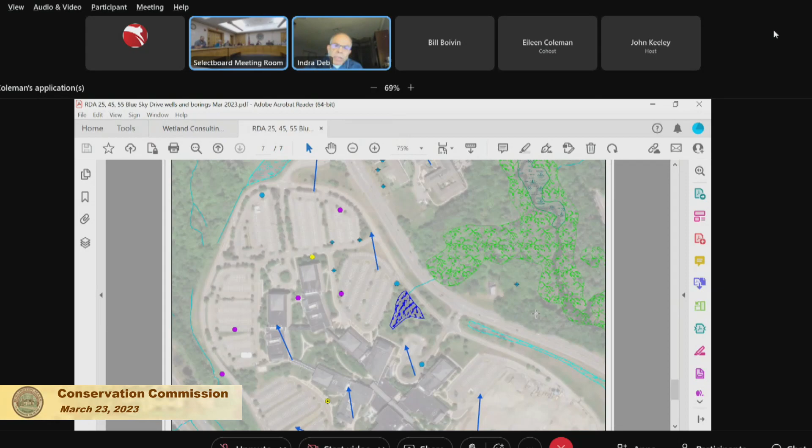So what you said is that there will not be any effect on the resource area, am I correct? Right, as long as the conditions are followed. We have proposed conditions about purging the wells and the discharge from the purge, and these wells are overseen by the site LSP. This site is a well-known contamination site, so it's heavily regulated.

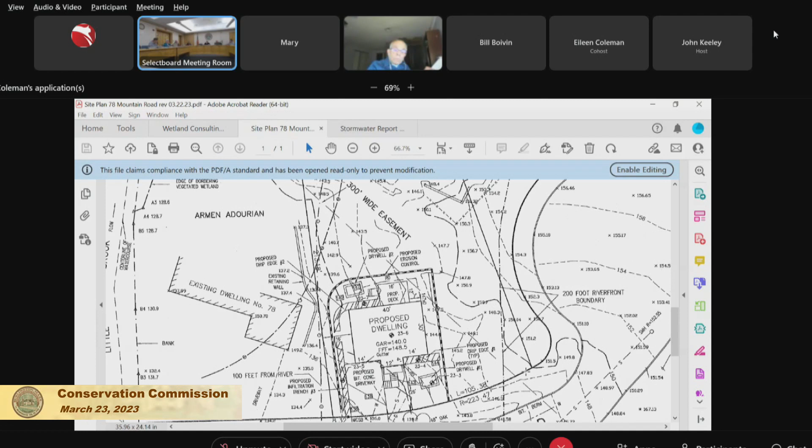Eventually, yes. Don't forget, inside the easement is Eversource, they cut all those trees. There's very little vegetation inside the easement. Yeah, but the steepest grades are where you cut. In other words, you cut northeast of the area marked Lot A, 20,130 square feet record, and the steepest grades seem to be after that, closer to his property. Without all those trees there, I have a feeling he's going to have a very wet yard, and I don't think you can rely on baby plantings to deal with it.

So I'm going to just write it down, because we can't solve it here. I'm not telling you that you need a drainage swale and a dry well towards the front to channel all the water in case it does come down there. I'm not designing it for you, but I might have expected something like that. I don't know if that's even feasible.

Forget Mary, I keep muting her. All right, so as far as the plantings, is there a planting plan somewhere that I didn't see?

I had one question on plants, just from the drawing itself. That drawing is still showing what I think was a huge tree, a 48-inch tree in front of the property. Is that still there, or is that gone? Eversource has a guide wire attached to it. So it's still there, the tree? Still there, yeah. Glad to hear that.

So in an area that was heavily wooded, which the commission would consider somewhat significant, I'm wondering do we normally specify a trunk caliper, like at 6 inches up, a certain trunk diameter caliper for trees? I would suggest their consultant confer with Eversource. Even outside the easement, Eversource will cut trees if they're over a certain height. They do that on our conservation lands, so she should ask them about species that are allowable, because you don't want to plant trees and then have Eversource come cut them down, so she should confer on appropriate species.

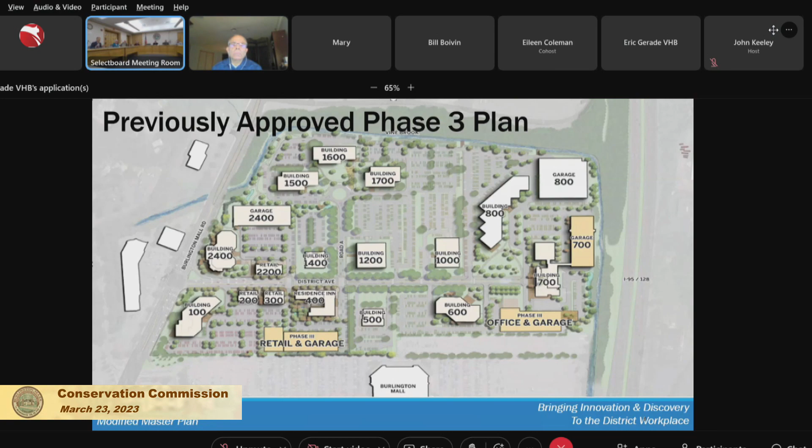For my clarification, were building A and garage A both previously approved, the garage included? There was, okay. It was 5 stories of office on top of a 5-story garage. That was the previous proposal that was approved, where it says office and garage. It was all one complex. Gotcha, it was known as the 5/5 building, but it was never built. So that's been scrapped, although the permits are still valid, and we're looking to go forward with a new lab building with a garage building adjacent to it instead of being below. Thank you.

In the area shown, we were able to pull the building a little further away from the resource area down at Building A. We were able to reduce the overall impervious areas within the riverfront area down there by just shy of 1,000 square feet, in addition to some stormwater management benefits as well. Along that edge, there is a nice rain garden today, so we are reusing that. It was designed and built, incorporated with all of that 5/5 intent, so we're not changing that.

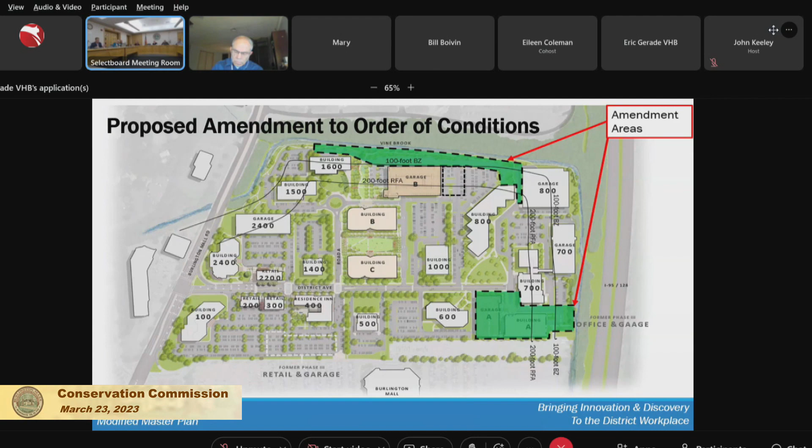And then the proposed improvements on the river walk, or the brook walk, we're able to pull the limits of pavement further away than what was previously proposed. That pavement up there today is pretty close to the bank, and in the previous approval, that walk was really tight. So Chris can get into that a little bit more with the Vine Brook path in detail.

Yeah, I'll just take a few seconds. Chris Jones with IBI Group, landscape architect. The top slide represents what we were able to achieve with the initial phases back in 2015, which was a small portion of the Vine Brook Walk and the overlook. I'm sure you have all been out there, and we placed the little overlook near the falls, and the walkway actually terminated, and you had to leave the trail right at 1600, building 1600.

And as Eric touched on, in taking a closer look at this, we felt it was really important to make this a quality environment and experience. We ought to take a significant portion of the head-in parking that occurred along the frontage of the brook and give that 18 to 20 feet back to the brook itself as a more enriched trail space. So we feel we've created a much better end solution. And another part of this that was key is that we found ourselves in the original design getting all the way down to building 800 and not having a great way to get back into the development.

We took a really close look at the area at the end of Building 800, near where it meets the garage. Right behind Building 800 there's a large paved area used for loading. The proposal is to shift the loading to the north and create a significant green island, or peninsula, that allows for a much higher quality pedestrian connection feeding back toward District Ave.

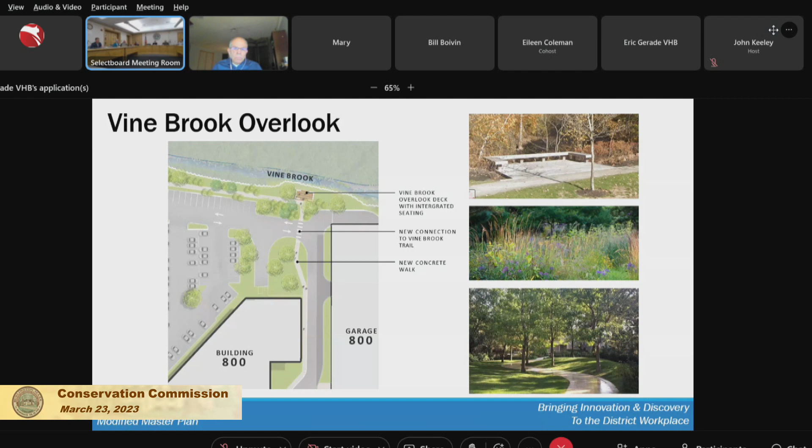All right, is this the right time to talk more about the Riverwalk, or should we wait? This is the right time - sounds right, because I don't know what you had in mind. I'd like to throw that open to the commission since it's such a big project. When we hit something of real interest to the commission, I thought we'd pause here. So first I'll go to staff, Eileen and John. At this point, do you have any comments, particularly on this extension of the trail further down along Vine Brook?

You previously approved this, but this is an enhanced version of what you approved several years ago, so it's great. Most of you have been out to the portion that's constructed, to the overlook, and it's great. You wish it were longer, and this will double or triple it, so it'll be a much nicer walk. The way they're tying it back into the park is great - you get to the end, and instead of turning around, you'll now be able to feed back into the park. It's a great amenity for people working in the park.

If you see the arrows pointing back into the park, there's a connection just south of Building 1600 - Building 1700 in that diagram would not be there - and there's a large connection back into the park. Then the one I described at the southern end, at Building 800, will have a new walkway allowing you to connect back in. Prior to this, there was no walking experience whatsoever. So this creates a full loop. Does anyone on the commission want to comment on this?

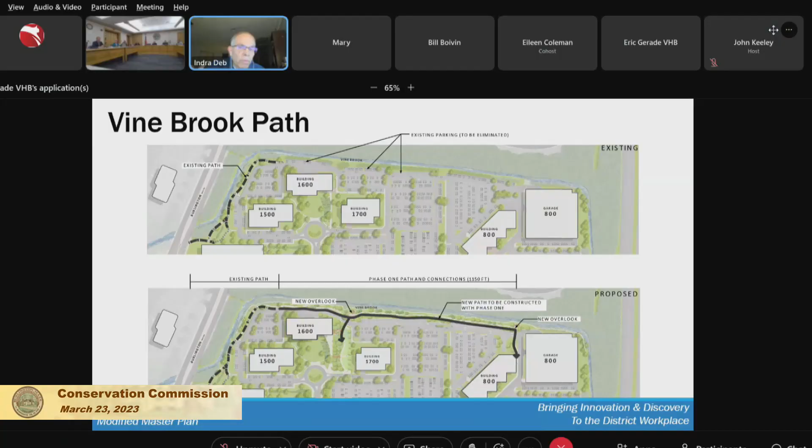So there's a total 10-story, a 5-story garage and over that a 5-story office? Yeah, it was compliant with the building right there, which I still call the Bay Bank Tower building, 700 District Ave, but that's an 11-story building. So it was going to be comparable, not as tall, but comparable to that, which was approved as part of the PDD for the height. They allowed it to be higher as you worked your way towards the highway.

Thank you, okay. Anyone else on the commission?

I wanted to bring up something. Sir, are you the landscape architect? Yes. What was your name again? Chris Jones. Chris, okay, Jones, okay. Mr. Jones,

I think this is fantastic that you're able to complete it. So my comments are not meant to diminish any of what you're proposing. Because we were the ones who were advocating it from the beginning, and now you're coming in and advocating we're going to complete it but make it better. That's what you're saying. Essentially, yeah. Essentially.

But there's an additional challenge I'd like to throw on the table that maybe you've thought of and haven't articulated yet. It goes in two directions. One is that the town has had their eye on improving connectivity for walkability. This project, as you're proposing the amendment now, goes to that point. However, we've talked about using Vine Brook as a focal point, perhaps even pulling back Vine Brook, which I'm not expecting this project to do. But I'm wondering if, at least heading towards the mall, there's a way of demarcating, like a cobblestone walkway, that enters into the mall area and eventually ties in with anything we do at the mall. In other words, promote the walkability to keep going all the way over to the mall area.

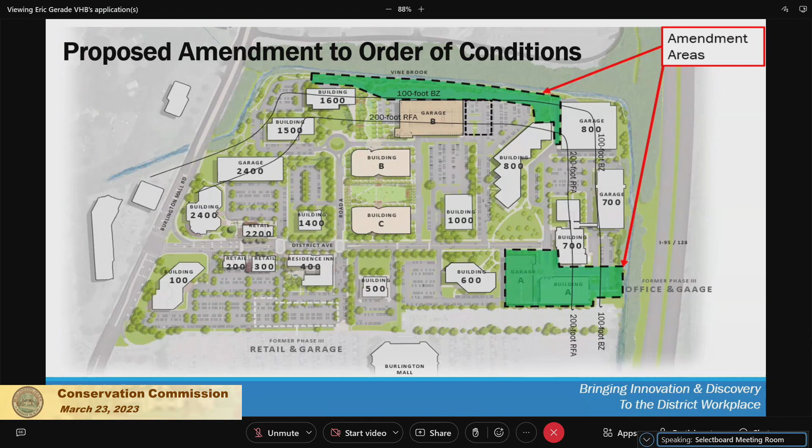All the way up through the well field when it's closed, perhaps. We call that the Riverwalk, for lack of a better term, and this would be part of it going in the other direction. So the concept would be that if and when - and I think there is going to be a when - the Macy's site portion is redeveloped, we would have the ability to provide a connection.

We don't have the best graphic to show it right now, but between Garage A and Building A, there's going to be a paseo walkway that would allow people from the Macy's site to walk through to our site, and then meander through to the Vine Brook.

Just a question, is the word paseo - I've never heard that before - is that French? Presentation... yeah, it's like a passage, passageway. Paseo. I'm gonna go home and look that up. It sounds fancier, sounds better.

It sounds good. I do think it would be difficult, if not prohibitive, to do - I park in that Garage 700 every day, I know how close it is, and I'm not sure I would want to be walking behind there. No, I think it would be very difficult. I'd like you to take a look at it, but perhaps you can confirm that it's probably not a good idea.

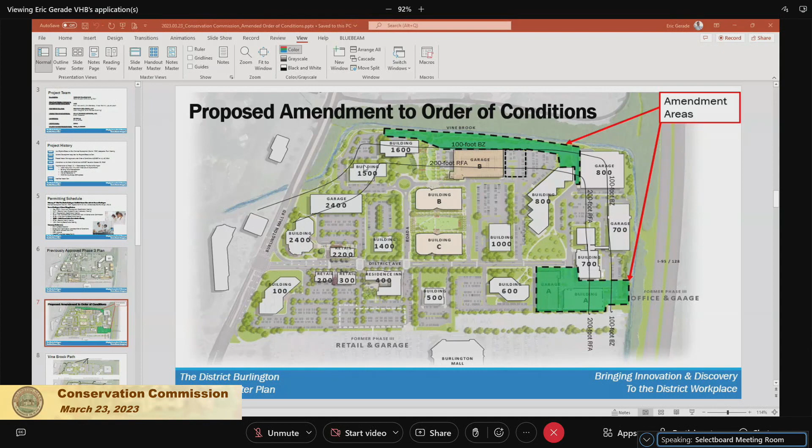To have a walkway behind the garage - I don't know how pleasant it would be to be walking right beside it either. It doesn't feel very safe, is I think our initial reaction.

That's why we tried to focus on the importance of extending what was previously approved, putting that concept to the side, expanding it, extending it, and really tying it back into the broader sidewalk network, so we could get people moving through the district, and like Chris brought up, having these moments along the Burlington Mall Road property line, making sure we're making clear indicators to where you can connect through.

Okay, that's good. So I think we were trying to pull up - we have about 55 slides that we presented to the planning board last week, but we didn't want to overwhelm this meeting, but we can certainly pull it up, we've got it.

Zoom out - could I... zoom it's out - an image of the paseo that Chris was mentioning, just to give you a sense.

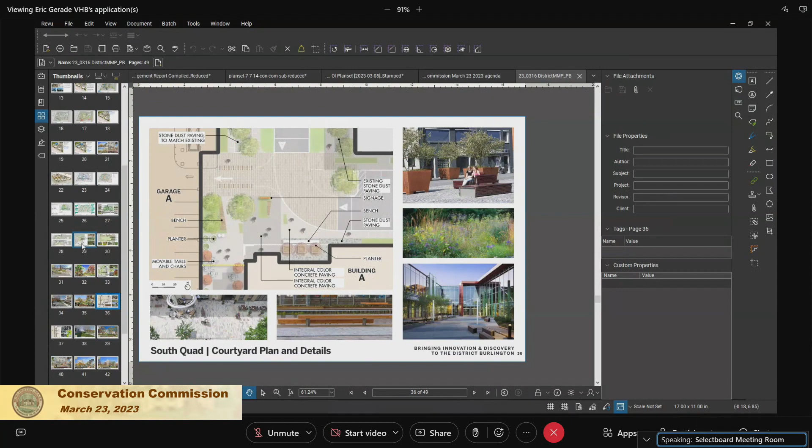All right, could I go to Bill now? Bill? Yeah, we're talking connectivity at the moment, and connecting the district to the mall. What about in the other direction?

I still have this high hope - words right out of my mouth - of connecting to the Lahey property in some fashion, to continue that walkway up in that direction. We understand there's a grade change, but you're aware that they have a somewhat neglected recreation trail? They have populated it with some nice poison ivy.

We walked it with Melissa a few weeks ago and Liz, to see what the appetite might be for that. There's a significant challenge with grade on the Lahey side of the property, of the river. We've looked at it, and it seems like if you get to the right person at Lahey, perhaps they would tell you that a pedestrian connection allowing their employees to walk toward the mall would be very much appreciated.

The question is where it would go and how you'd accommodate the grade change. I don't think there's anything we're doing here that would preclude that from happening, but there are a lot of issues with it—it's a grade change, and I think there would be ADA issues too. If you provide any pedestrian connection there, you have handicap accessibility concerns, so because of the grade it would be difficult.

Do you know the right person to at least inquire with at Lahey? We represent them, so we've been involved with them, and I can certainly chat with them about pursuing this in the future. I don't want it to hold up our project though. I'm not proposing we hold it, but as part of this proceeding it would be great to say we had a conversation and they have some ideas of where they'd like to move it forward, without making it part of your project necessarily. Understood—this just seemed like a relevant time to bring it up.

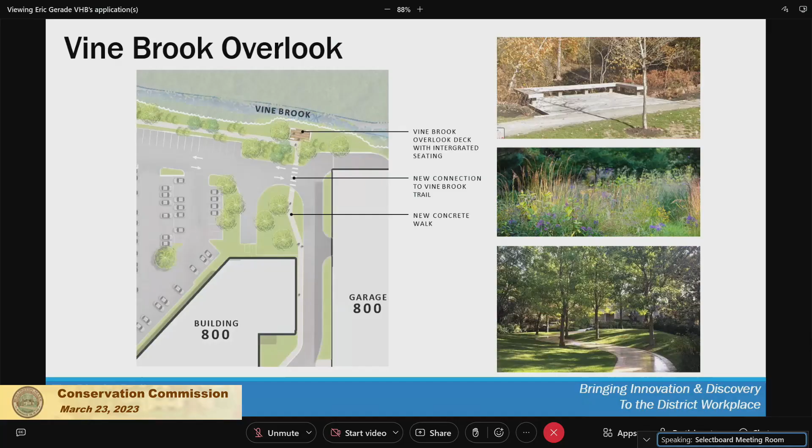Where is that pipe on the drawing? It's actually better shown on the stormwater plan. There's this pipe here - it's actually on this side. There does look like there's more than one arrow there, but there's only one location where there's an actual replacement of the outlet in the bank.

So you'll be going into the bank for the replacement of that? Yes. How deep is that? How deep will that trench be? I think we're down about, I want to say, 6 feet or so. Okay, great.

Have you provided a description of how you're gonna do that - cut into the bank and do that at all? Is that in the materials? So it's not, and that's why I wanted to bring it up this evening. It is shown on the plans, on the stormwater plan, but there isn't really a work description. It's means and methods of the contractor, but what we'd assume is that there would be a trench dug to the depth of the pipe, and the pipe would be replaced. The work to do that - about a week, maybe. It's quick, yeah.

And return to grade, probably 3 feet wide or so. How wide do you think? Yeah, 3 to 4 feet wide, bucket width. John, do we need some details of the precautions necessary to avoid additional bank destabilization? Yeah, we should have a narrative. Sure, yeah.

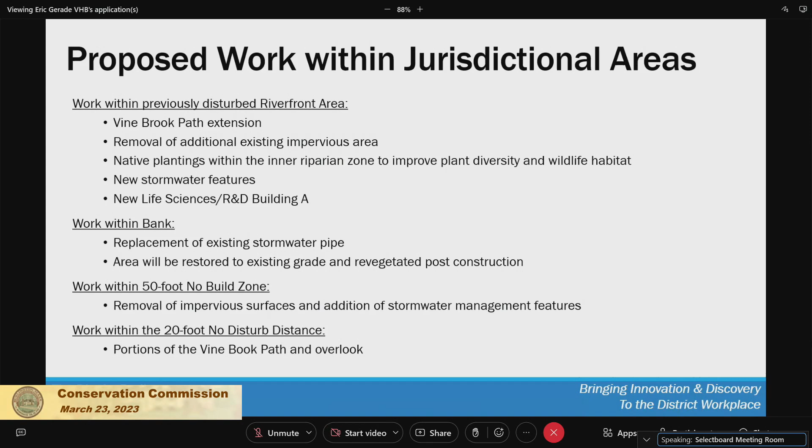No buildings in the no-build zone, just removal of impervious surfaces, and no work aside from that one pipe within the commission's no-disturb distance.

Do you need any waivers at all for this work from our no-disturb or no-building zones? The pipe we mentioned would be within your no-disturbance zone. I'm not sure if work on an existing utility requires a waiver. Some of the path moving back out of the 20-foot will involve work in the 20-foot to do that, I would assume. Yeah.

I'll hand it over to Eric to talk stormwater. Rolling into the stormwater management design for the amendment, since the previous amendment the town's regulations have changed with enhanced phosphorus removal requirements. The proposed improvements are compliant - we're removing adequate TSS, and for the project as a whole we're upwards of 67% on the phosphorus side with the infiltration basins.

Our overall stormwater strategy uses low-impact development and increased open space, so we are reducing impervious area overall, restoring the natural water cycle, enhancing the Vine Brook corridor with native plant species, and implementing erosion and sedimentation control measures during construction, plus a long-term stormwater O&M plan, which the property management team has done a good job maintaining the existing structures out there.

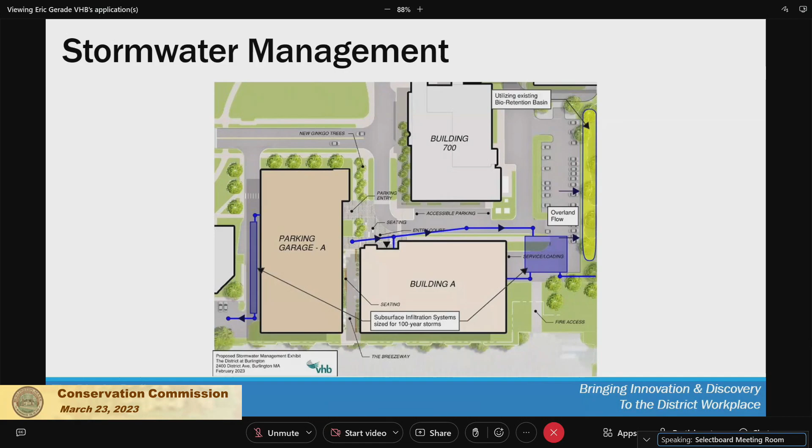That's outside the resource area, but overall we're tying back in, reducing peak rates at the various design points, primarily Vine Brook. We broke the study area into multiple points that discharge into Vine Brook, because we're still utilizing some of the existing infrastructure out in the park today, so we wanted to make sure we weren't impacting that.

Tying into that, moving on to recap some of the overall benefits we're providing: removal of impervious areas, native plantings, wildlife habitat enhancements, and enhancing the health of the stream and the adjacent wetlands.

So with that, we'd like to... not sure if you thought we could get into the next filings for the notice of intent for another portion of the property, but if...

Okay, let's talk about stormwater then, in case there's any comments. John or Aileen, do you have any comments on this amendment, anything about what they've said regarding stormwater?

I've already asked a couple of questions, but I have one additional one: the parking deck, is the top of it open? There's no canopy over it or anything like that - is that the idea? Correct.

Maybe solar, I guess - so we're talking about having a solar array on there. How would that affect the stormwater runoff up there if you had solar canopies? It's the same area that's being collected within the roof drain system up there.

Is the quality of the stormwater off the solar array different than off the floor of a garage? It's being warmer - it would be cleaner, right? I'm just wondering if it can be treated differently from a stormwater management perspective as rooftop runoff. It's still going to drip off the canopy onto the garage, fall onto the floor, and pick up at least some of it, so it would still want to go through the same treatment system.

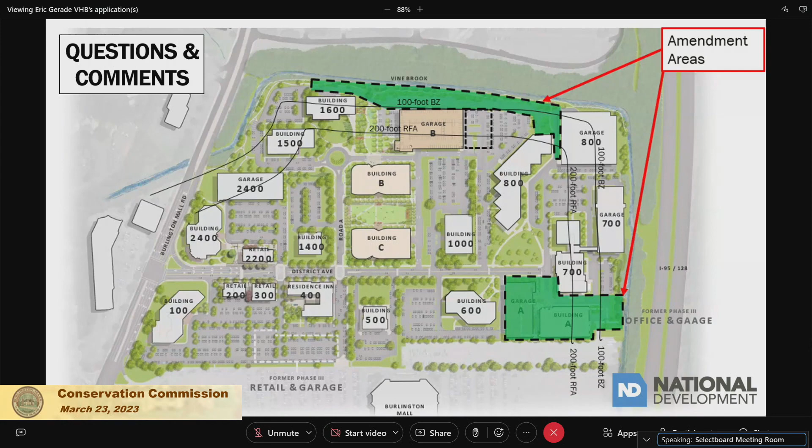I know a lot of them are newer, they were installed in 2015 with the Building 700 expansion in that general location, so I would anticipate they're modern structures, but we can certainly check. I'm interested in the old ones that haven't perhaps been looked at lately, and whether we should have something on file that they were looked at, if it's within this amendment, and upgraded if needed or fixed if needed.

I think within the limits of this project there's only two catch basins, right? Whatever existing ones are in our area, we're going to be ripping out. Right, and there's two new ones shown on the plan, right? So it may not apply, my comment may not apply, you're saying? In this area, that's my recollection. In this general area, correct, yes.

So I should file that comment in the back of my brain and retrieve it for the next hearing? Larry, if it makes you feel any better, I've been in touch with Katie and various other people, and they sent me, because we're trying to get a handle on all the maintenance records, a bunch of stuff a few months ago before this came up, and I didn't know this was there.

So I know they have been cleaning regularly, and I have maintenance reports. I don't know about this exact spot, but throughout the whole of the district, they have been. Okay, in fact, that was the other thing I was going to ask about, whether they've been doing the maintenance on them or not, or they need to be cleaned out. So you say they have been doing them? I know they sent me a few years' worth recently, didn't you? We had a whole meeting about it.

A meeting this past summer. And I think our record keeping, we were doing the cleanup, but maybe not in years prior, doing all of the record keeping, but we've caught up and we're doing the record keeping and all of that paperwork has been sent along to Eileen.

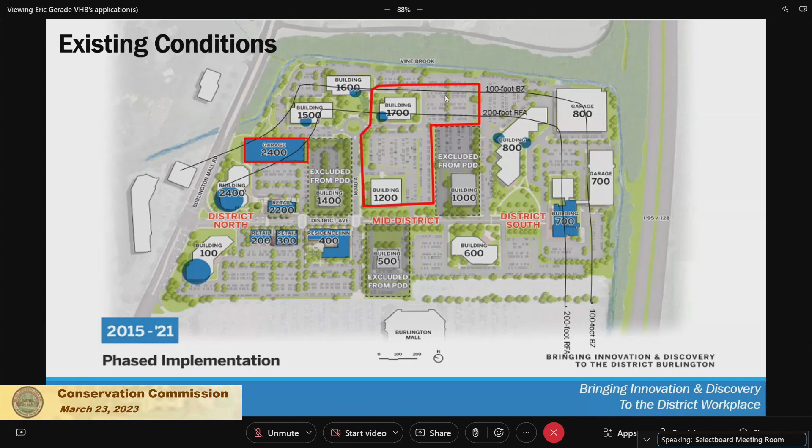And it becomes that portal to the brook that we talked about, which we're really excited about. It's also an opportunity to expand adjacent to that existing rain garden and incorporate new rain gardens that will be occurring in that park. Where that large parking field was between building 1200 is now becoming our central park, essentially.

And it becomes the feature piece between these new lab buildings. It places green open space in the middle of the entire development, which is really going to bring people and walkability to more parts of the development versus just having most of that walkability occur on District Avenue where it does today. So it's trying to draw it more to the brook and spread it out. It's a really significant enhancement to open space, and not only for the users, but for the public as well. These are open spaces for all to use.

So do you have more to add to that?

From a technical standpoint, the purpose of these slides is to highlight the area for essentially the new notice of intent in the areas in red, showing the new B and C lab buildings, Garage B, and also Garage 2400. You touched on the parking and what that real demand is, and do you really need to build all that parking?

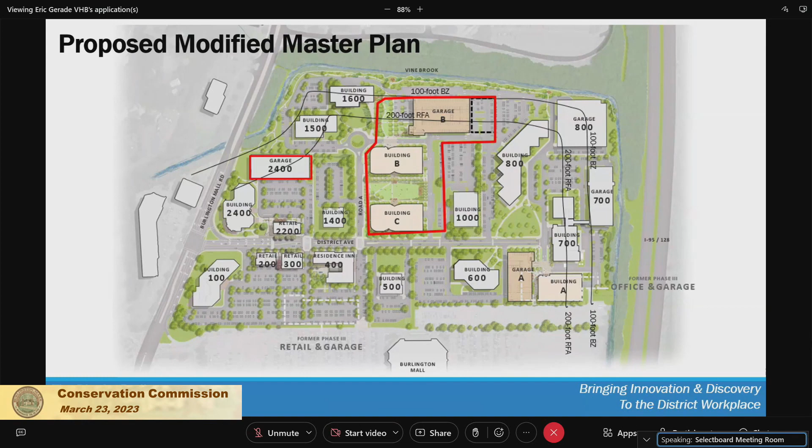So this dives in more to - yeah, this is just a zoom in of that Brook Park you're seeing.

So you see Building 1600 and the open space generated where Building 1700 occurred. It's a combination of a small amount of surface parking, primarily to support accessible parking in proximity to the buildings from a code perspective. To the left of that surface area, to the west, is outdoor gathering space that supports Building B, designed as a meandering path to give a hint of where you're heading, reflecting the meandering qualities of the brook - so we've called it Brook Park, from our own perspective.

It's sort of a tale of two spaces. To the left of the meandering path is a more densely planted dry stream and rain garden component, and to the right of the meandering path is more of an open lawn space for people to gather.

There are two crossing points of the rain garden that feed both Building 1600 as well as make connections to the north. We've tried to make those crossings generous enough that they actually become little gathering spaces, where you feel like you're sitting above the rain garden and can see it on both sides.

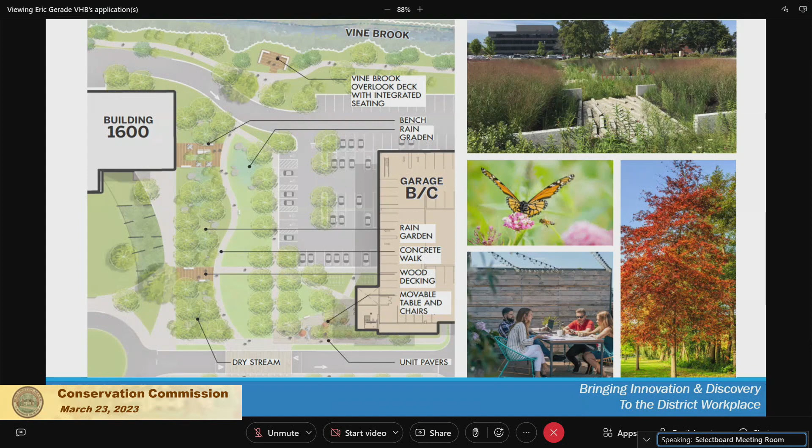And then the Central Park, just quickly, is meant to be a real programmed, active performance space, so there could be concerts, movie nights, cycling events, or whatever they want to do out there. You could have all kinds of fitness and social gathering in the center of the park, and at the edges there are not only circulation patterns but also a lot of seating pockets incorporated into the shaded areas along the north and south movements, as well as a little bit of a shaded gathering space out on what's called Road A. Really just a diverse mix of use types within that central space.

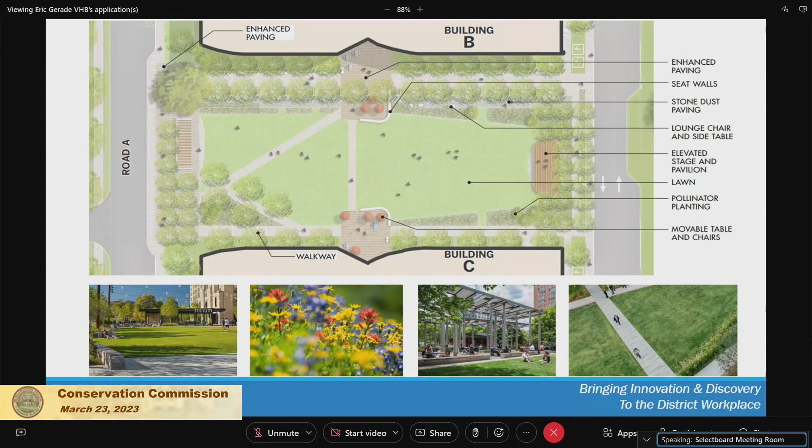I'll just highlight these really quickly for you. The work is within, at least portions of it, previously disturbed riverfront area, and all of those features Chris described will enhance that riverfront area, as well as remove existing impervious area. Again, no buildings within the 50-foot zone, and in this case no work within the 20-foot no-disturbance zone, so no waiver would be required.

Just some pretty standard mitigation measures that would happen during construction - nothing that you wouldn't see in an ordinary SWPPP, but wanted to highlight these as far as what the contractor would be doing during construction. Those are all shown on the plans as well.

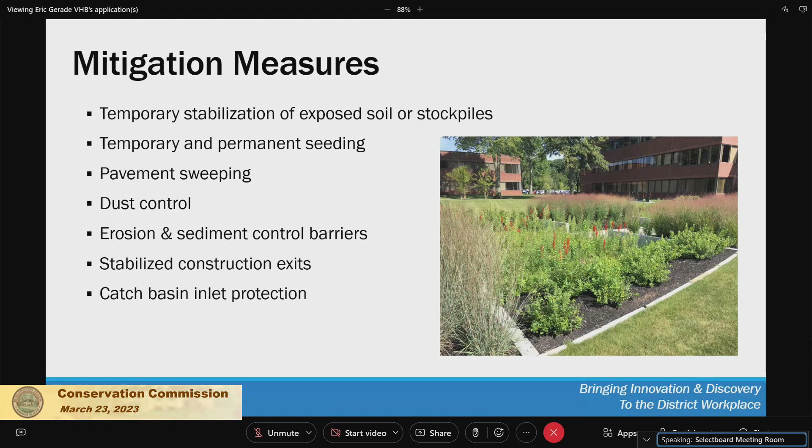Back to stormwater management, which uses the same stormwater report for both the new NOI and the amendment. It's identical - it's obviously all connected.

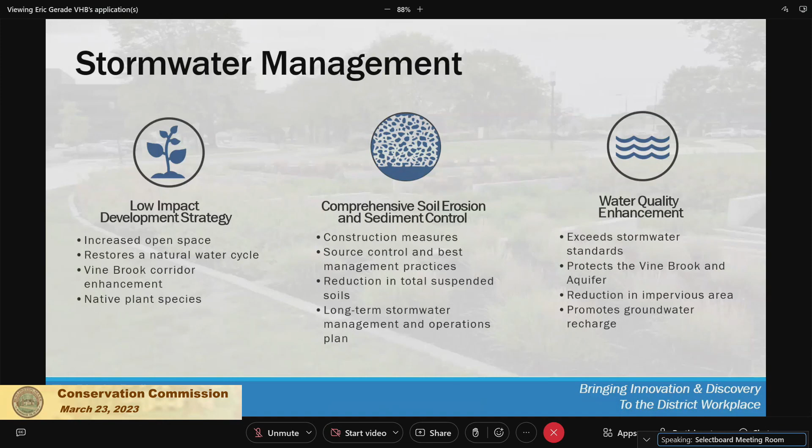And the benefits are the same as well. So this is the same slide, we're implementing very similar techniques as we discussed previously, incorporating the treatment train with the deep sump hooded catch basins connected into pre-treatment prior to the infiltrating basins.

So we are providing 44% pre-treatment prior to entering the infiltrating basins. We are within the LUHPPL land use with higher pollutant potential loading due to the vehicle trips generated at the development. So the overall stormwater management plan focusing now on building B, C, and the garage.

You can see we have a series of subsurface infiltration structures to provide groundwater recharge, as well as phosphorus removal with those infiltration devices. Additionally, the lighter blue are the surface basins, coordinating with Chris on making those really nice looking rain gardens, providing infiltration benefits and capturing some of that surface stormwater runoff to reduce the need for additional structures in the ground as well.

Ultimately, we are tying in along the new service road and access into Garage B, replacing and adding a new trunk line down that road, which ultimately connects to the existing stormwater system in the small roundabout in front of 1600. And at the end of that, we are proposing a Stormceptor water quality unit.

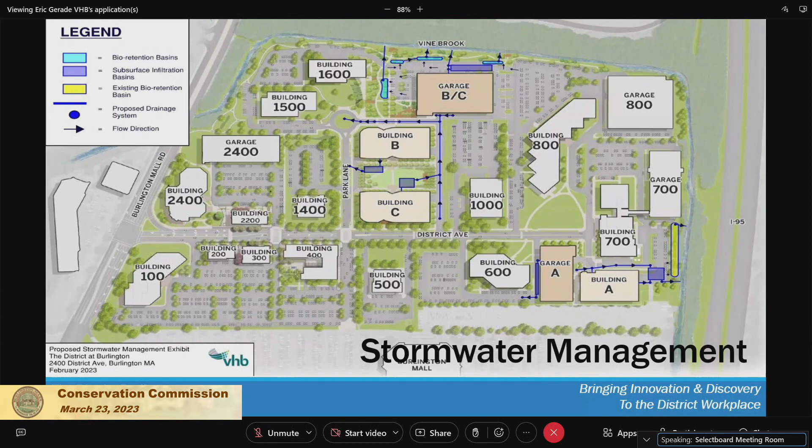That's to provide the water quality TSS removal for that run. But overall, from the stormwater management goals and loading rates provided at the site, we're still over for phosphorus as a whole. So we're unable to fully infiltrate that run, but we are providing the best management practice we can at the end of that run prior to connecting into the existing system, which ultimately discharges into Vine Brook. So overall as a whole, we are at 81% for TSS, 67% for phosphorus.

And highlighting project benefits again, the removal of 15,000 square feet of impervious area. And I think the other number we had was about 66,000 square feet of general public open space that is going to be provided by the project as a whole. So just a huge benefit with the couple new parks that are getting put in.

And then similarly, the native plantings within the riverfront areas for the wildlife habitat benefits, and the increased plantings throughout. I think we got upwards of almost 400 new trees with the project. So that's our quick overview.

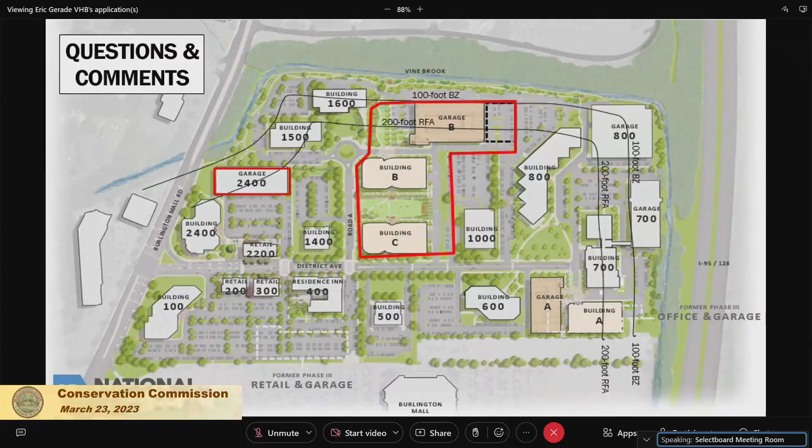Thank you. Let's see if anybody has questions on the stormwater aspects you described. John and Eileen, did you have any comments on this so far for these lab buildings? Just one comment - so because this is work in the riverfront area, you do need an alternatives analysis?

Oh, it's all previously degraded riverfront area. It's a redevelopment, so it's all previously degraded. So if it's a redevelopment, no alternatives analysis? If it's totally within degraded area? Correct, it's totally within degraded areas. And we do provide an improvement, significant improvement, and that's the requirement for redevelopment.

Anything else at this time? Nope. Okay, Indra, anything? I just want to ask one question now - is that, I heard 66,000 square feet open space is being added into this development?

Correct. Yeah, it's open space that also includes the public amenity areas, so it does include sidewalk and some of the hardscape that Chris is incorporating into the landscape design. So it's not just pervious area, it's the whole amenity space.

Thank you. Okay, Kent, any comments or questions at this point? No, nothing, good presentation, looks like significant improvement, so. All right, Emily, anything? Bill?